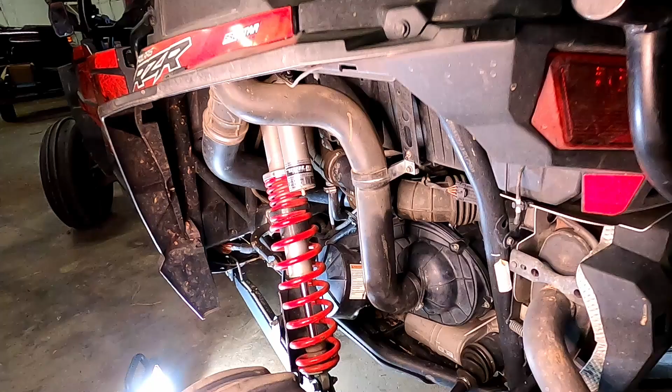Well, as you can see here, we have a classic case of shredded shroud. And this time, it's not just from the belt blowing, even though the belt blew, but my flyweights came all the way out and did a full rotation around and ripped up all the plastic. I don't yet know if my inner shroud is too far damaged or what.

I was climbing a dune and I got to the top and gave it an extra burst of power to get over, and my belt snapped. So I've been told that potentially when the belt snaps, the clutch can come in too far and that can cause the weight fingers to come out. But I'm not sure, so I'm gonna give this an honest, fair shakedown. Was this just something bad that happened, or was this a result of the clutch being manufactured poorly?

So we're gonna go through and tear this down piece by piece so y'all can see what happened and see what the outcome is. All right, we'll see y'all back in a second. So yeah, it's shredded. That thing just came all the way around it like a hacksaw and just beat it up. So the outer cover, it's toast.

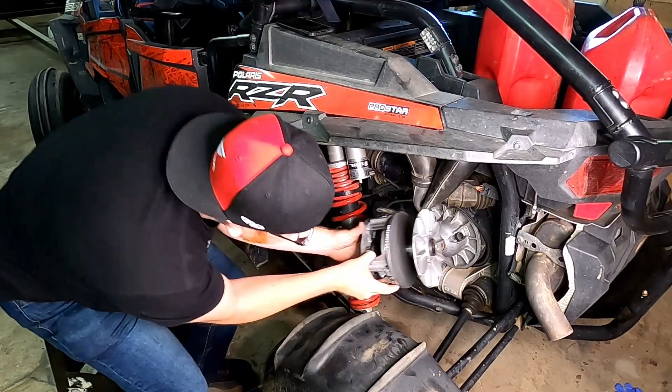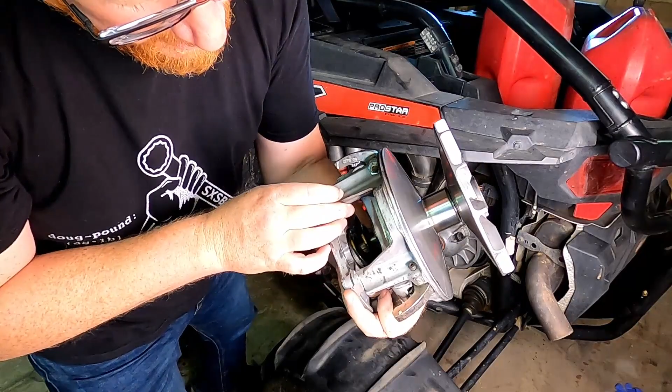All right, so here it is. These weights came back so far that they dented the sheaves. There and there. All three of them are out, and all three of those little knuckles are busted. Yeah, we're gonna have to take this apart and see what happened.

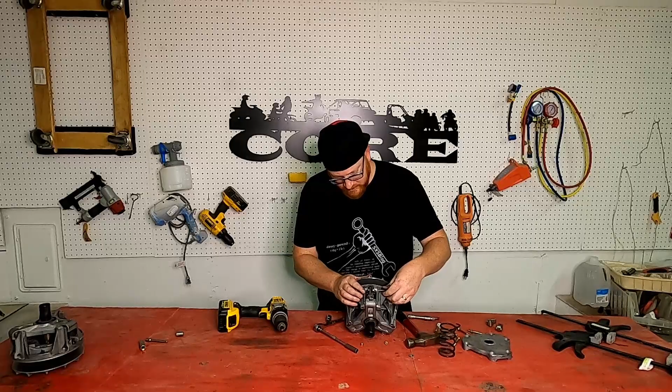Luckily, I believe I'm going to get to keep all of my EPI clutch weights. They're going to need some new bushings. That's a whole lot cheaper than the weights. All the pins, let me see, they don't quite roll right. They're all bent, and the sheave is bent.

We have this crack. Now, one of the things I'm really curious about is the rollers, because these weights shouldn't have ever went over the rollers themselves. So if they're worn somehow, that would allow it to bypass. I'm gonna see what the manufacturer says on this and see if they're willing to cover this warranty. And we'll see if this is gonna be a 3-star or a 0-star rating on this clutch, because customer service can go a long way, and sometimes just the right conditions happen.

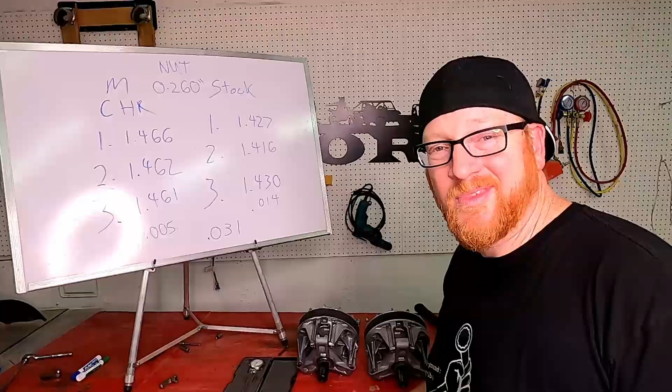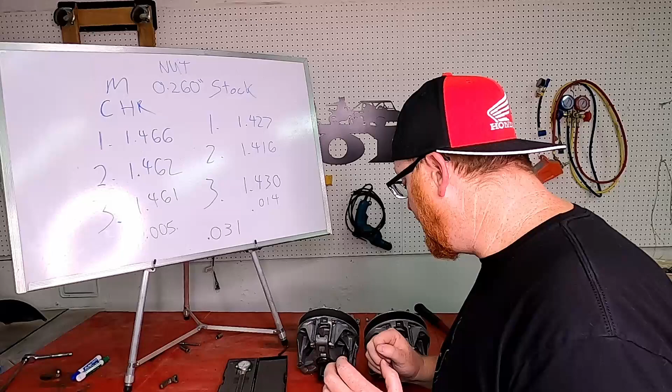Okay, you know things just got real when you see a whiteboard and calipers. The thing that happened is it was allowed for this to slip past the roller in order to come out and break that. To measure from this pin to the roller, because that's going to be how much distance this is allowed to be able to break free. And I wanted to see if there was a tolerance with the Mother Clutcher versus the stock.

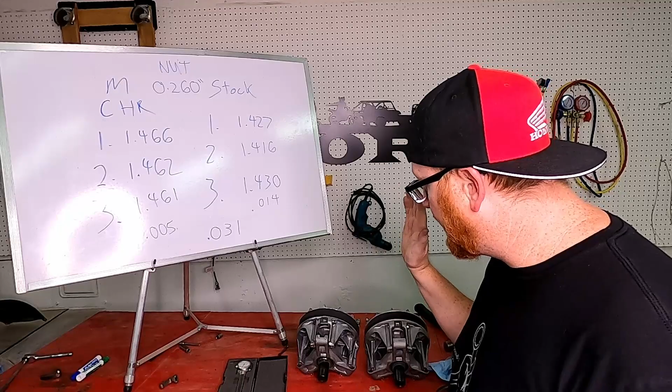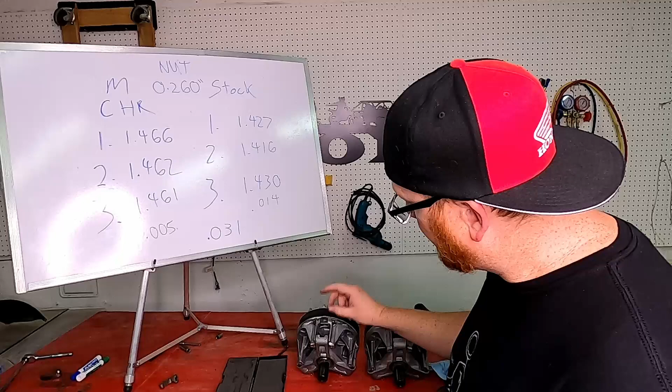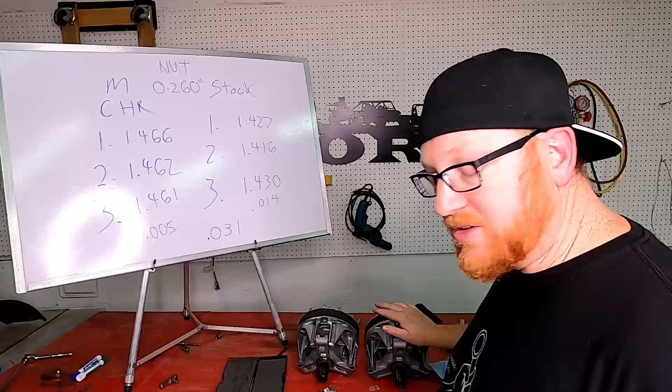Now, this stock was taken off with about 2,000 miles on it. So these parts have wear on them. And then this has between 200 and 300 miles on it. So this one should have more wear. I used this nut to add as a gap, so I used the same pin and the same nut on every single position. This caliper is in inches, and these are my measurements. As you can see right here, I had a flat spot on my clutch where one of my bushings is hammered down. So that came out in that.

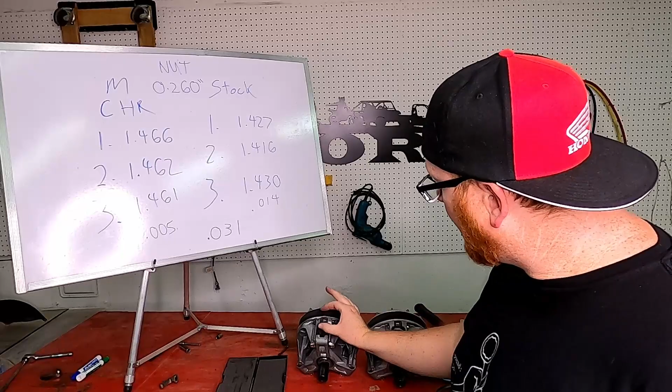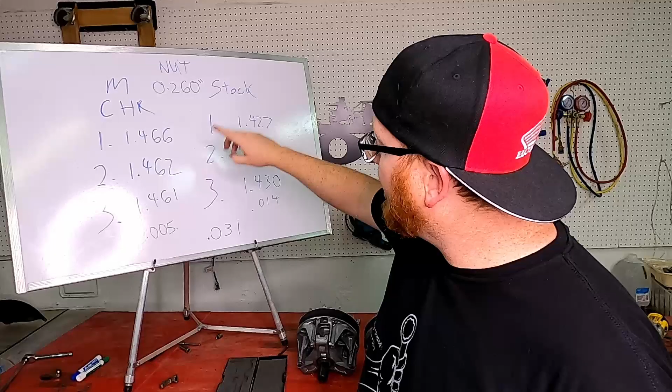But what we want to see is the smaller the number, the less likely the weight can escape. So on the stock, we are averaging around 1.429. These are all averaging about 1.462. So this one had good results. We only had a 0.005 difference in the number range, and in the stock we had a 0.014 difference in the number range. The difference between the average is about 0.03. So if you want to see what a 0.03 is, that's about right there. I'm going to do a little more digging and see if I can come up with something different.

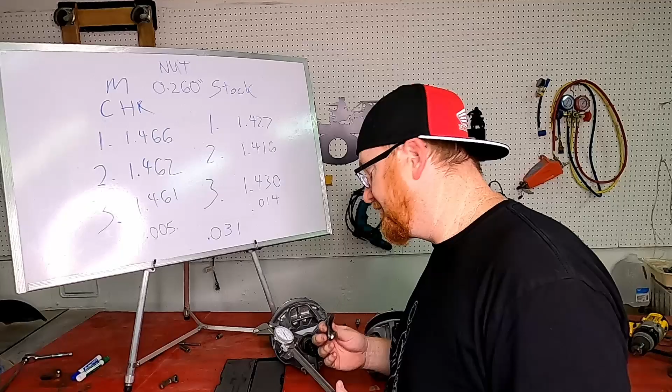Behind the scenes from the last clip, I went and checked the castle nut and the spider nut, and they were good. They did not back off. I put my socket on there, put them in my jig, and put some torque on it. They did not back off. So I didn't have the nuts backing off to cause the extra 0.03 distance. So I decided to go ahead and contact the seller, and he, without any fuss, sent me a new unit.

So this is brand new from the seller, the Mother Clutcher. B. Harvey ATV Sales on Amazon was who I contacted, and without any fuss, he just said, sorry this happened, sent me a new clutch, and he said, I also have a new clutch cover for the front that got tore up. So I'm really happy with that. You can't hardly ask for better customer service than that. Just came out, offered it right up front.

So I sent the clutch back, and once I sent him the tracking, he sent me it pretty much Prime, because it came here from being ordered Friday, and this is a Tuesday. So it got here quick. So I'd still give him a 4-star rating at this point because it was good customer service, replaced what was broke, and no hassle.

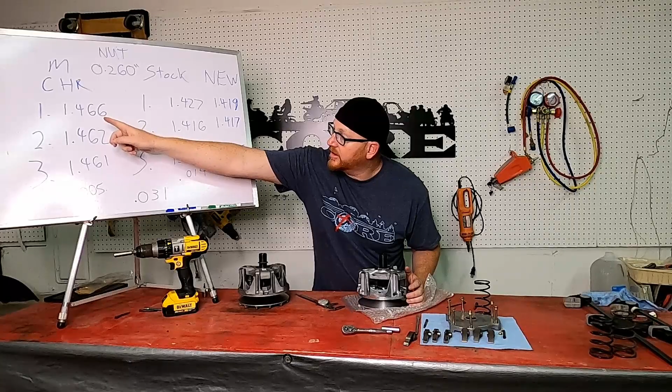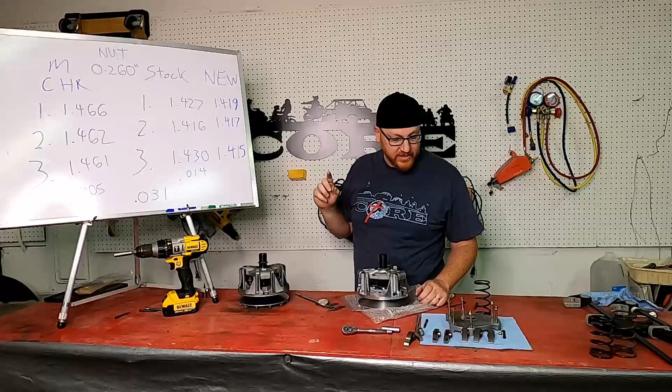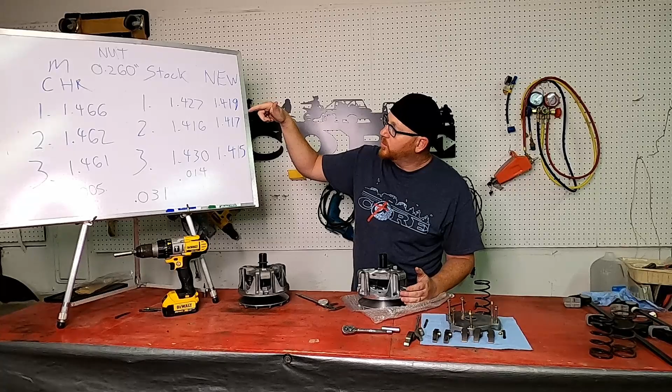So I went ahead and calipered this new one to compare it to the Mother Clutcher that was broke and the stock one, and here are the measurements on the new one. So this number being smaller is a good thing. That means it has less of a chance of the weight slipping past the rollers. So the new one had really tight pins, and that gave us 1.419, 1.417, and 1.415. So those are smaller, tighter tolerances. So we must have had some of the effect from having the damage.

So anyway, I'm going to put this on the RZR, continue the testing, and we'll see if it was just a freak accident, because on the rock clutch kit, the spring is a lot shorter. I mean, the tension doesn't really reflect that, but just having less material in there could have let that sheave come together faster. And then these are heavier weights, and the belt broke right when I had to floor it to get up the last of a dune. So I don't know which came first, the chicken or the egg, but because of his good customer service, I think he deserves another chance.

Today is the day I'm making a change, building things today.